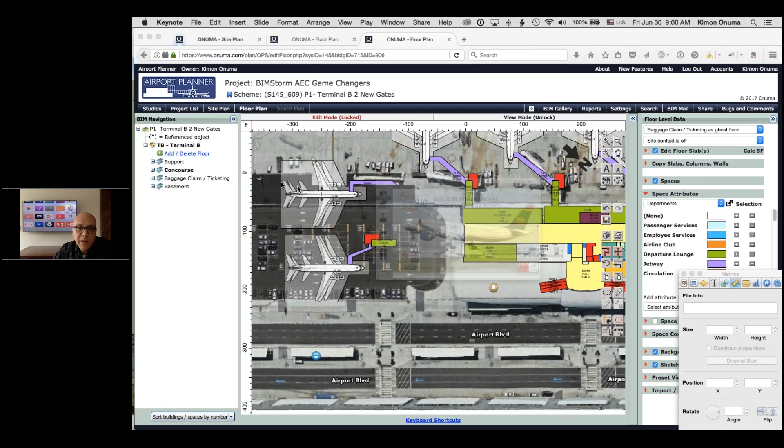Today is about a window seat on BIMStorm AEC Game Changers. If you go to BIMStorm.com, you can see the introductory webinar we had a month ago about the BIMStorm. We're happy to have San Jose International Airport and their data and floor plans inserted into the BIMStorm. We'll be presenting that today.

As far as the scenario planning, we'll be going through what we have been prepping for the last 10 days in preparation for this webinar and for the next few months to come.

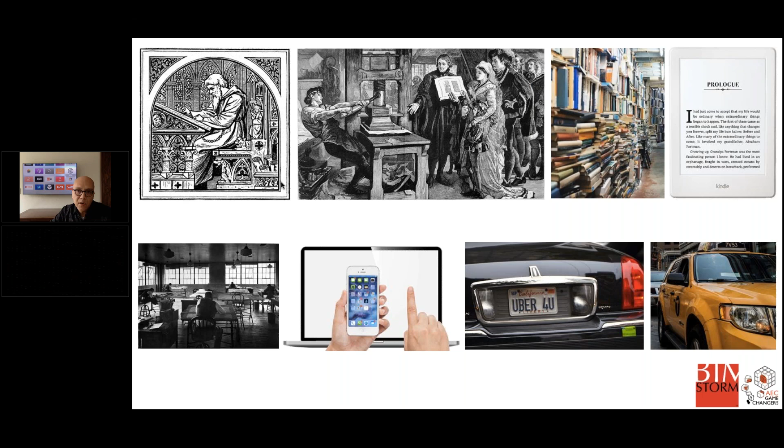This is about game-changing innovation, and technologies around us have completely transformed our world and how we work. We feel that the AEC industry is ready for this. We're ready to shift how we work in design, construction, and operation. That's what the BIMStorm AEC Game Changers is about.

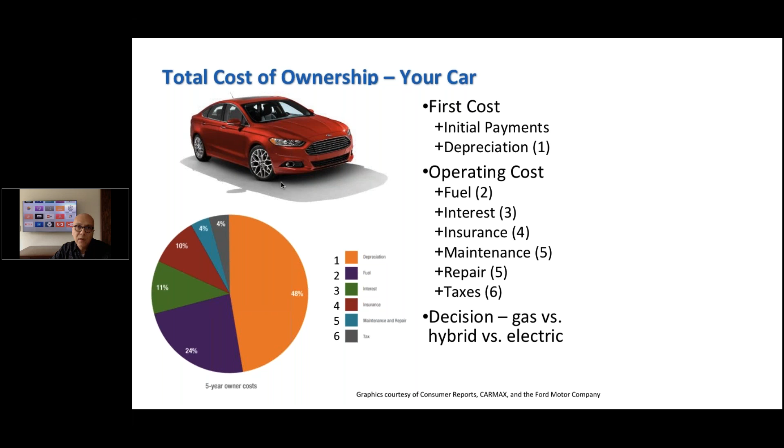Dana's presentation yesterday was about the total cost of ownership, and this really fit in nicely with the theme of the BIMStorm. This is something being developed at APA as part of the TCO working group. It's really about looking at everything beyond the initial cost of purchasing a car or designing and constructing a building. There are other costs we don't typically look at very carefully in the AEC industry, and we think that's the opportunity. How do we connect the dots and look at the total cost of ownership versus just the first initial cost?

To predict the future isn't really any magic beyond knowing that a roof is going to fail in 25 years and carpets are going to go in 15 years. So how do you factor that into the design, construction, and operation of a facility?

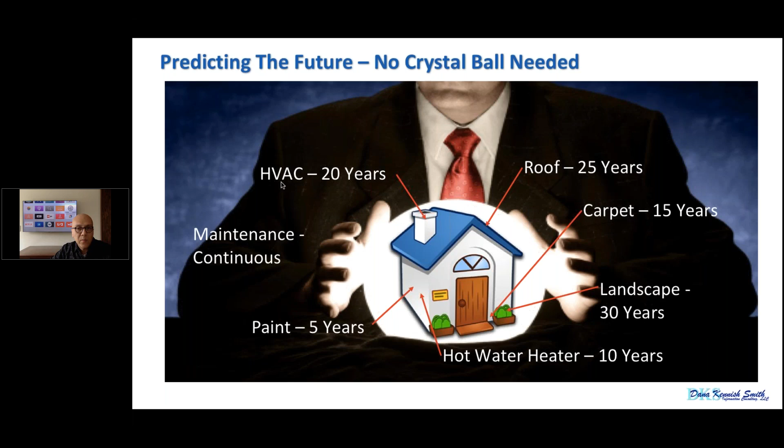Even in BIMobject, if you look at their products online, imagine if there was more information about the actual life cycle of the products, how much it's going to cost, for example, for a standard incandescent light bulb versus an LED bulb over time. Then we start making decisions based on that information.

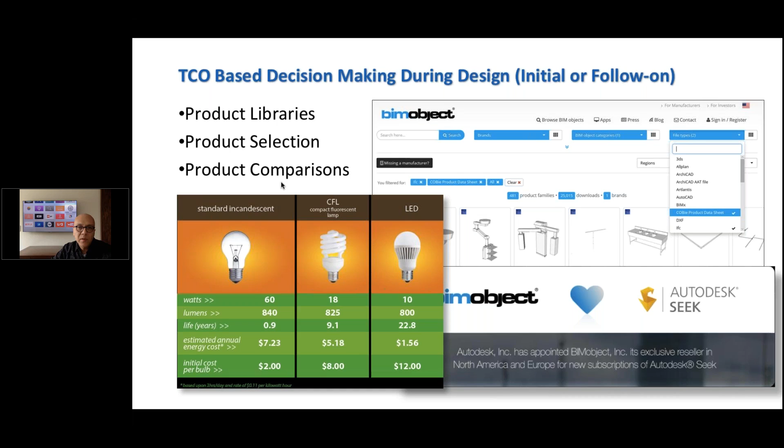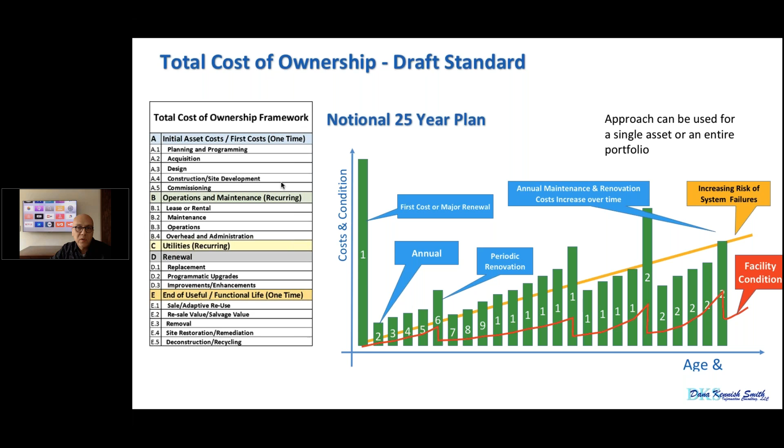So whether it's an individual light bulb or an entire building, or the entire life cycle of a building, there are stages that have been defined as a draft standard from the TCO working group about the total cost of ownership: stages A, B, C, D, and E. This fits in very nicely with the BIMStorm because we're talking about planning, design, construction, operation, utilities and costs, and then end of useful life—what do you do with it? An airport is a perfect example to work on for that.

In BIMStorm we are looking at Big BIM. We're not just looking at the single project or the single set of software tools. We're looking at the entire life cycle and how we can generate value beyond the initial design and construction of a facility, expanding the horizon.

In game-changing innovation, we had a series of great speakers, and today we're happy to have with us Jim Bedrick, who's going to give us some great examples of what's been happening in the building industry as well as outside of it, and how we can learn from that. So Jim, thanks for joining us today—are you prepared to switch screens and show us your presentation?

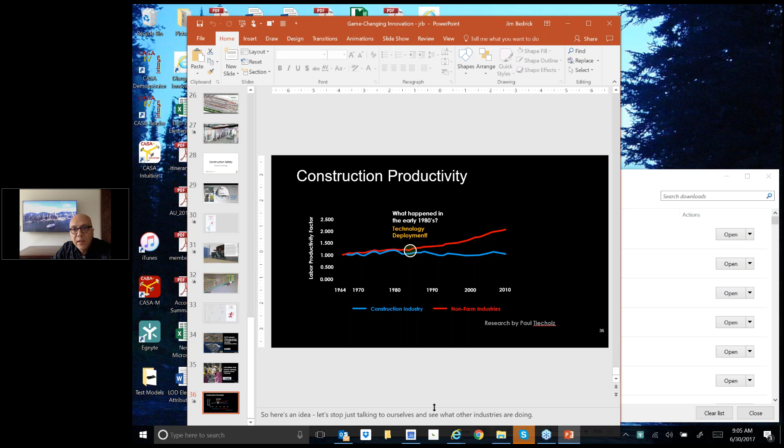Jim, are you there? Yes, can you hear me? Yeah, okay, had to get all the switches set. Thanks for coming, okay, thanks.

The issue is that many of you have probably seen this curve. The red one is overall business and industry in the United States, with farm industry taken out because farm production has soared in recent years and would skew that curve even higher. That's basically the productivity of overall business in the US. The blue one is productivity of the AEC industry. So you can see that while everybody else has about doubled their productivity, we've remained pretty much flat.

So the question is, we keep having these conferences, the AIA conference or the AGC conference or whatever. Some expand beyond their particular discipline into a broad range, but most conferences we see are to do with the AEC industry. So the question is, if these other industries have doubled their productivity and we've stayed flat, why aren't we talking to these guys?

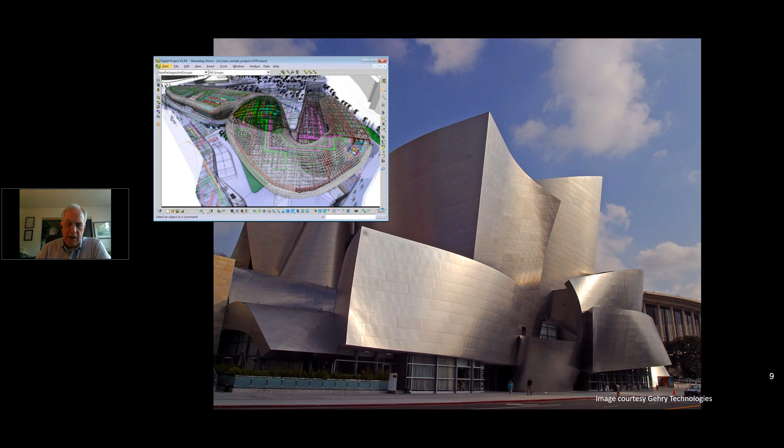Well, this industry does - again, the aerospace industry. They have to model all kinds of curved shapes. So Gehry Technologies got hold of Dassault's CATIA and put basically an architectural overlay on it, and now you have Digital Project, where you can model things like Gehry buildings.

Now, here's a really interesting one: integrated circuit design. So what possible application could this have to buildings? Well, first of all, there's just the processes of design and manufacturing. What do the manufacturing processes by which these things are produced do that AEC does not?

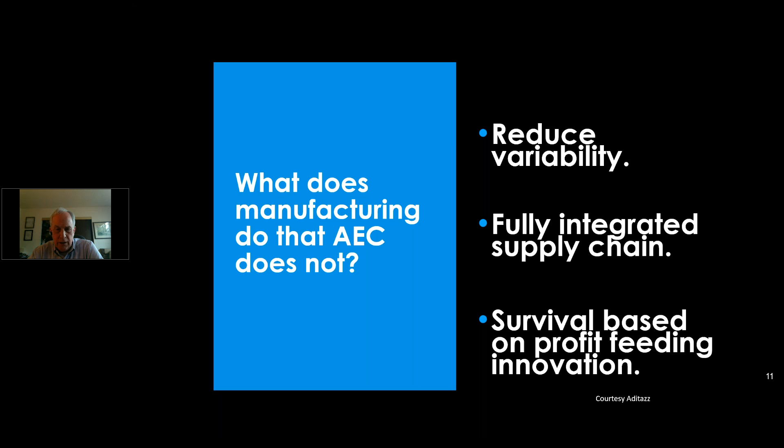They reduce the variability and fully integrate their supply chain, but the key point is that their survival is based on plowing some of their profit back into innovation. There's a takeaway for us, because most of our firms consider innovation a side issue and a cost, but these guys know they're not going to survive unless they plow something back in.

If we take another look in that light at the productivity of the construction industry, here we are way down at the bottom. So how come? Well, everybody talks about our fragmented processes, but also the buildings have increased in complexity, and we haven't kept up with that.

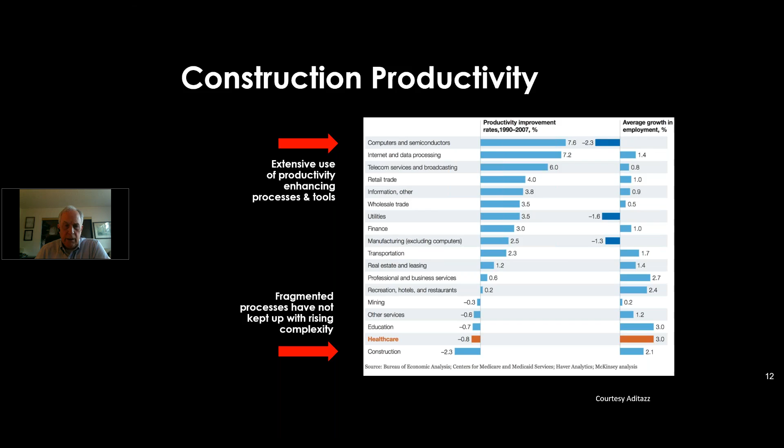Up here, where the productivity is high, they use productivity-enhancing processes and tools extensively. So like what? Let's take the example of the first transistor on the left there, and then how those are made today. That chip on the right has 2.6 billion transistors in it.

So what's the difference here? How can we produce these things now when we built this thing by hand before? Well, that was designed by hand. This chip is designed using electronic design automation. This thing was manufactured manually, the transistor on the left, and the design and manufacturing were separate. Today, the microchip industry tightly coordinates manufacturing and design. This took several days to assemble the first transistor. Now thousands of these chips are manufactured per hour.

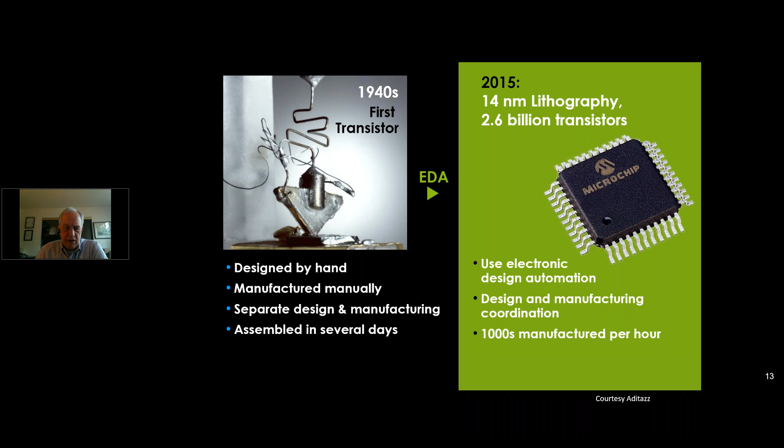The process used for the first one produces a lot of variability in quality, and it's pretty hard to mass produce that. Now we've got mass production, and it not only keeps up with Moore's law, this is one of the real drivers of Moore's law.

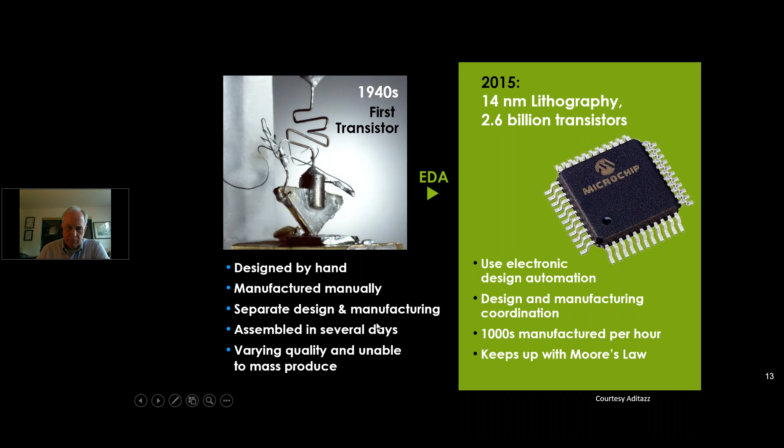So what does that have to do with our industry? If you look at the design of a microchip, things have to get from point A to point B in a certain amount of time, because the distance the signal travels will vary the time, and signals have to arrive at certain places at certain times. So things have to be adjacent, there have to be paths between them, and so on.

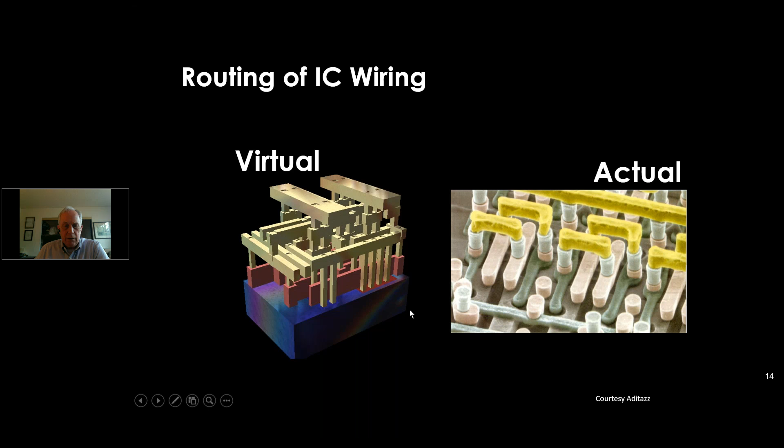So maybe you're starting to see a little bit of a similarity here. We talk about traffic paths and adjacencies and so on in our industry. If you look at the thing on the left, that is a design for a chip. On the right, we have a stacking diagram of a hospital. There are some similarities you can see there.

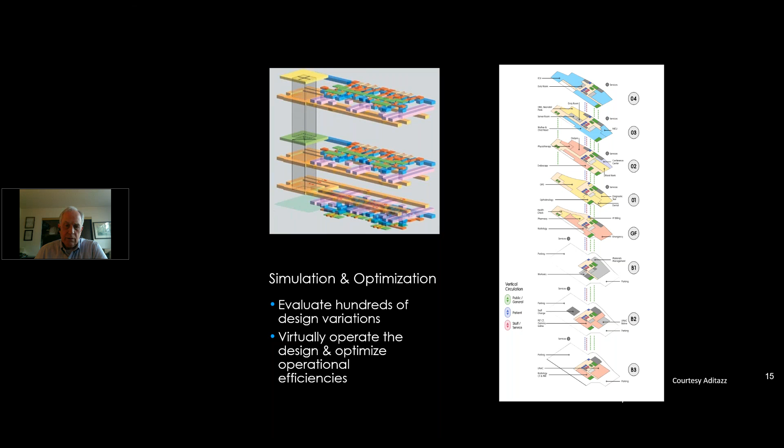In the chip, the EDA approach, electronic design automation, the chip industry is able to evaluate hundreds of variations and virtually operate and simulate their operation so they can pick the most optimal. An outfit named Aditazz applied that same design approach to buildings. We've got adjacencies, we've got traffic flows, and we can simulate the operation and pick the most efficient.

So if you compare these, compare a healthcare building with an integrated circuit. They both have high civic value, they're both significant capital expense, mistakes are costly in both of them, and they're both very complex. But the difference is they both require coordination across multiple disciplines. So how do we do that in our industry?

Some of us, sometimes, best practices are documented and recorded. Oftentimes they just simply live in a senior designer's head, and then they're applied ad hoc to new designs. In the integrated circuit industry, these tools are codified and put into the automated design system so they can be applied next time very effectively.

How do we deal with complicated systems? Well, in our industry, we route all of our MEP systems by hand, and at best we put them together in a model and see where they run into each other and start bending things around to make them fit. In the integrated circuit process, data flow is placed and routed automatically. We're going to get to how that specific one can be applied in a minute here.

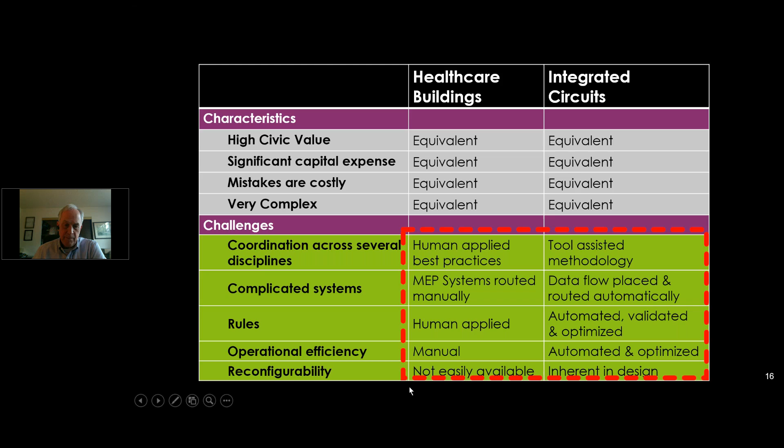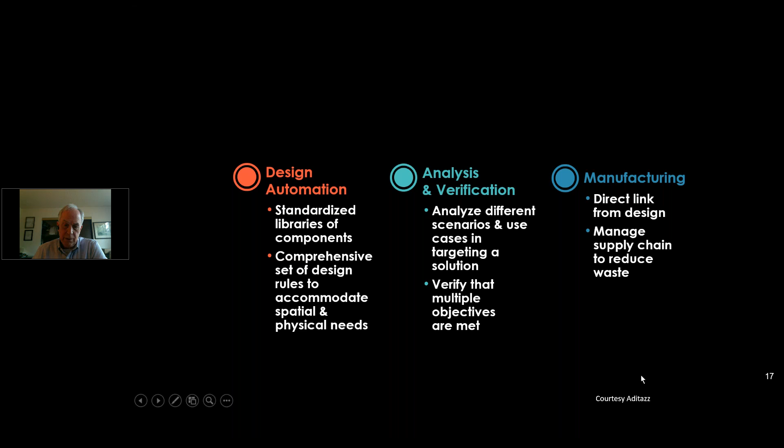And then in manufacturing, they have that direct link from design to manufacturing, which the mechanical trade industry adopted quite a while ago, where they can take their detailing software and generate code to drive the machines that actually fabricate ducts. And then managing the supply chain, thanks to the Lean Construction Institute, we've gone quite a ways down the road to getting a more efficient supply chain in our industry. But that came from outside the AEC industry.

So we mentioned there this idea of routing and optimization, not only in terms of layout of floor plan, but then in terms of routing of systems. And this again comes from the aerospace industry. And if you look, you can take a look at this.

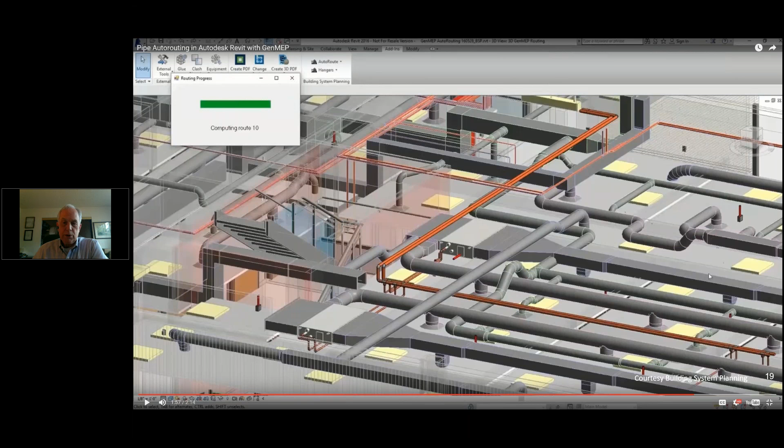This plenum here—you know, we think we've got it tough trying to avoid all the clashes in there. But look at an aircraft, and all that stuff has to fit into a wall that's a few inches thick of the airplane. Well, a program was developed for the F-35 program, where they put some Visual Basic on top of CATIA and developed some automatic MEP routing systems.

Well, an outfit called Building System Planning adopted this, acquired the IP, and applied it to MEP routing. So the main issue here is that they take these algorithms for clash-free routing. So rather than routing things and then fixing the clashes, they route them—they use heuristic algorithms to route them without clashes in the first place.

Well, how is this developing? Right now, automated point-to-point routing is accomplished—they're doing that. The next step is complete coordination and optimization. So it's one thing to get a duct from point A to point B and get it around all the obstacles between point A and point B, but what about getting the most efficient route? Basically, in a duct, the fewer bends, the less friction losses you have. And then the next is, of course, carrying that on to automated detailing and generation of CNC code to actually manufacture these from the design we just developed.

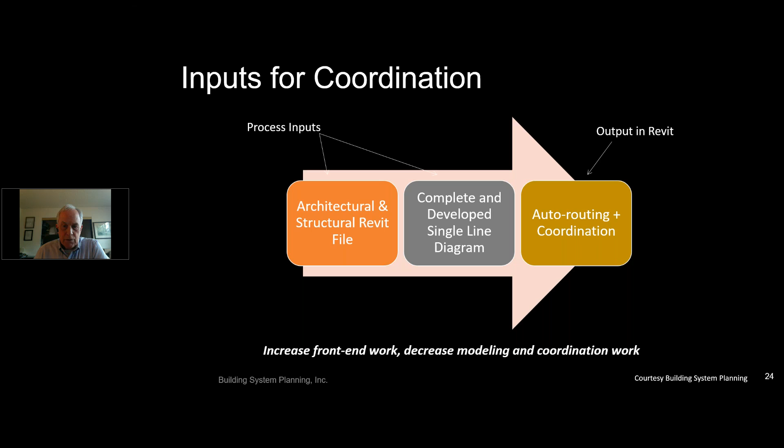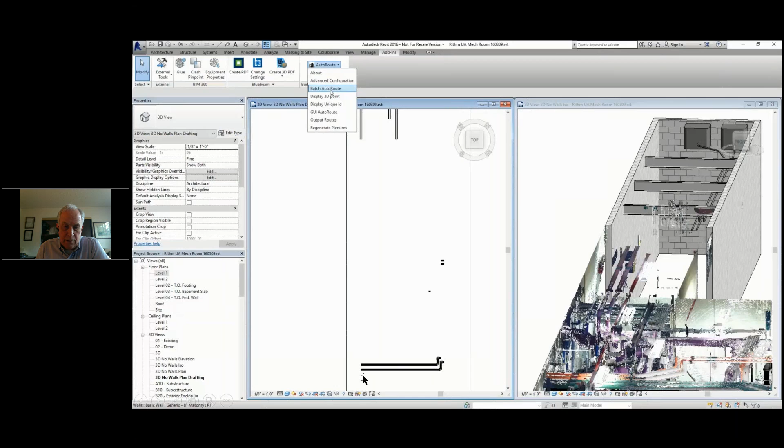So the routing, you can see that the system routed that and managed to avoid the obstacles that were nothing but a point cloud. So it works very well for adding new systems to existing buildings.

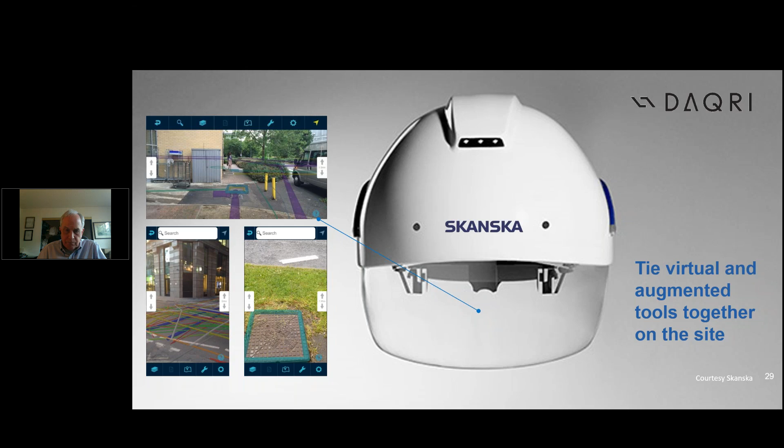Okay, here's a really interesting one that a couple of outfits are dealing with. These are some examples from Skanska. They began by using virtual reality helmets, the DAQRIs, and basically doing mixed reality where they superimpose designs and created scenarios on actual construction sites.

So they looked at this and said, okay, if we look at how we learn things - if we read about them, the author describes the subject, so we just hear about it. If we watch a movie, we observe the action, what's going on. Well, then if we get to an immersive game, one of the role-playing games, we actually are the subject.

So how this was applied to construction safety, there's an example here. They had fixed protocols for unloading heavy loads - they were supposed to be analyzed first, a plan made, and people spotting, and so on. Well, in this case, that didn't happen. The guy went to unchain the load and was hit by several heavy steel members.

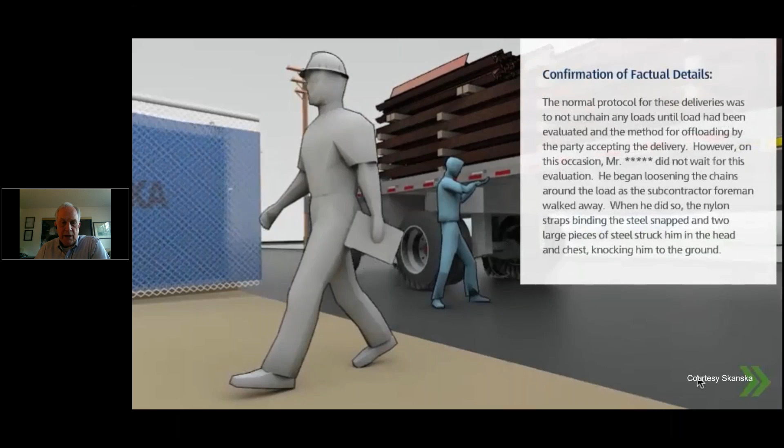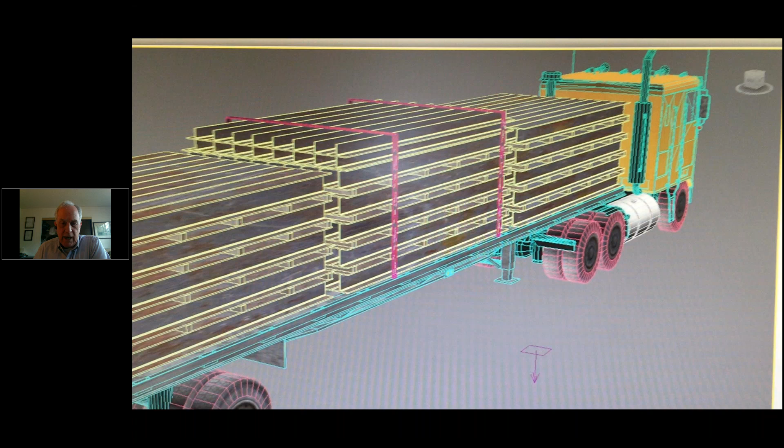All right, to train on this particular incident, you could read about it, you could watch a movie of it, but what they did was create a video game, and the trainee would come in and say, okay, how am I going to unload this? Well, I'm going to go up and just loosen those chains. And then, whoops, that's what happens. Now, obviously, this is going to be a lot more effective than reading about it or watching a movie. You just saw those steel members fall on you.

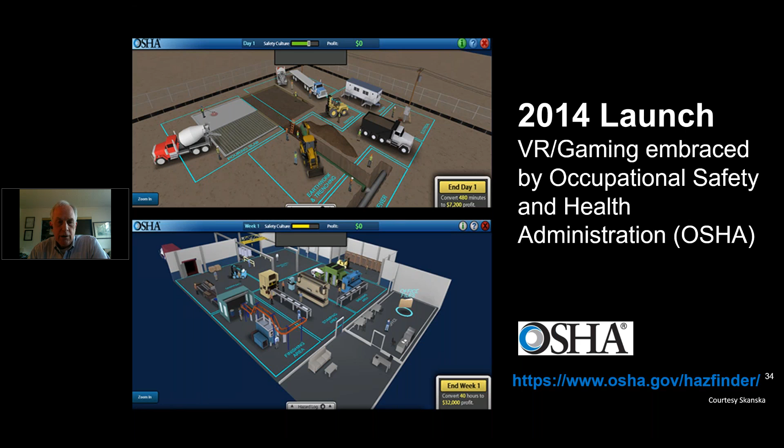So this is a case where the trainee became the subject, that expanded back in 2014. Even OSHA adopted virtual reality and gaming technology for safety training.

Some of the rental outfits, like United Rentals here, have also adopted it. And here is a guy that's training on how to use a lift, and he's actually watching himself place the things that he's lifting here. Obviously, a whole lot more effective than reading a manual.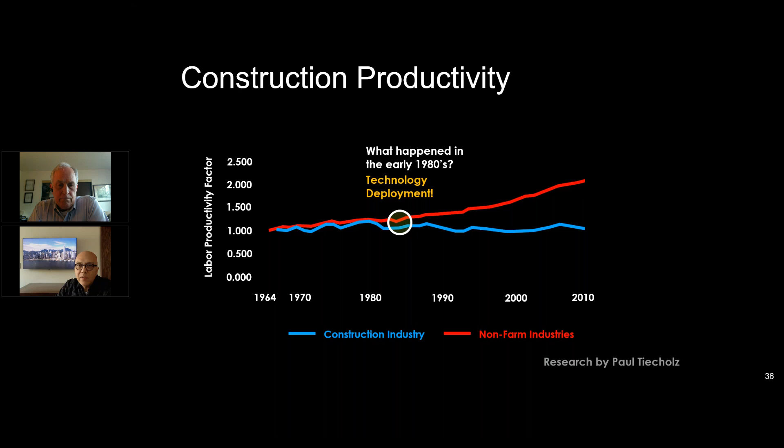Okay, Kimon, did you want to take some questions? Yeah, thanks, Jim, that was great. Yeah, so a few questions and comments. Let me switch back to my screen here.

What you talked about is game-changing innovation, essentially, and what can happen with the AEC industry. You and I both have been very involved with many standards organizations and industry groups like the AIA, the IPD. We were both on that committee, and you started all that, and you've been a great innovator and a push for the industry. But do you think the AIA and architects are changing fast enough? That really always concerns me, looking at what's happening elsewhere and that we're not applying it. We're kind of waiting to be told what to do. And that gap obviously is an opportunity, but if we don't take that opportunity, others will. What's your view on that?

Well, that's a great point, Kimon, and there are two issues there. One is that we often talk about, well, we're going to wait till the owner asks for it. We're not going to do BIM until the owner asks for it. Well, the owner doesn't necessarily know. The owner is not an expert in the design and construction industry. We are. That's what we're getting paid for. So we need to be proposing to the owner the kind of things that will help their project.

The second piece is, you saw that piece there with the chip industry where their survival depends on plowing some of their profit back into innovation. Now that is starting with a few people - I believe Mortenson is one of them - actually having an innovation department, whose purpose is to actually find new things. I think we have to go there in order to really make any advances into that gap in productivity.

Good morning, everyone, good afternoon now. My name's Mark Giuliani, I'm with Giuliani Associates Architects. We're a firm that's been practicing architecture in the aviation and transportation industry since the late 1950s, and we've been involved in every part of airports, from small coffee shop kiosks all the way up to very large hangars and complicated cargo facilities and terminal buildings. Kimon and I have worked together on several projects, and I'm delighted to be here today to help Kimon demonstrate some of the work he's doing.

Kimon, we can't hear you. Thanks, Mark. Just to reiterate, we had Patrick Crowley on from San Jose Airport on our last webinar, and he's not able to make it today, but he will be with us for future webinars. Patrick actually initiated a discussion. He was watching previous webinars where we were talking about healthcare planning, and he was asking a lot of questions from an airport perspective, and we decided to actually make that part of this BIMStorm.

What we want to show you next is what's happened over the last, it hasn't been that long, about 10 days, and you can follow it on BIMStorm.com as well. We saw this from Patrick. He sent us some documents about San Jose Airport, PDF and CAD files, and we said, do you have any GIS files? We started looking at the type of data they had, and we said, you start with what you have, and what can we do with that type of information as we put it into a BIMStorm and make a scenario.

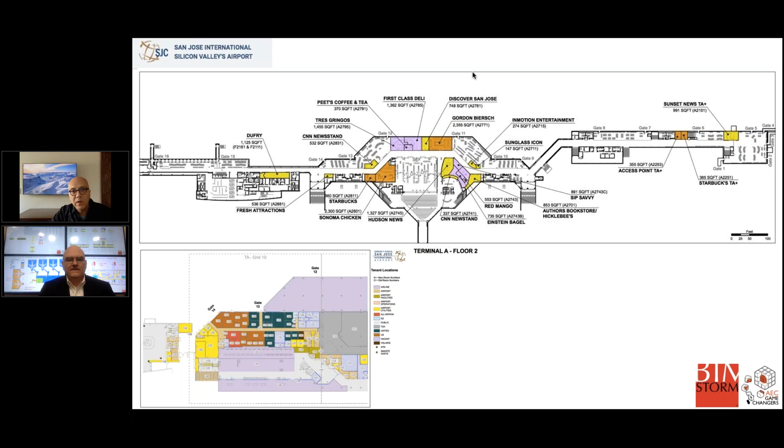So we built up these scenarios, and these are actually live on the web, and Mark's team and the Onuma team and others have jumped in and started to run through planning scenarios. It's amazing how much can be done in a very short period of time when you start connecting the dots, taking data and automating things into the model, then generating what-if scenarios with it, putting the knowledge of a team like Giuliani has about airports into the mixture, and converting.

For example, we looked at the master planning documents that were in PDF format from San Jose, and we saw that they have existing facilities, a pretty new Terminal B, and the master plan talks about a 700,000 square foot expansion with 10 new gates, a new 9,000 car garage, and a new 3,000 car garage. We also identified a clinic off-site, right in San Jose there, that would be a perfect place to land a medical facility, which we're making part of the BIMStorm.

So this BIMStorm is going to include, obviously, airport type facility information, but also office space, office moves, renovation of existing facilities, and a new healthcare clinic. We're really putting a lot in this mixture and looking at it from a perspective of how do we challenge the industry and actually do things with this.

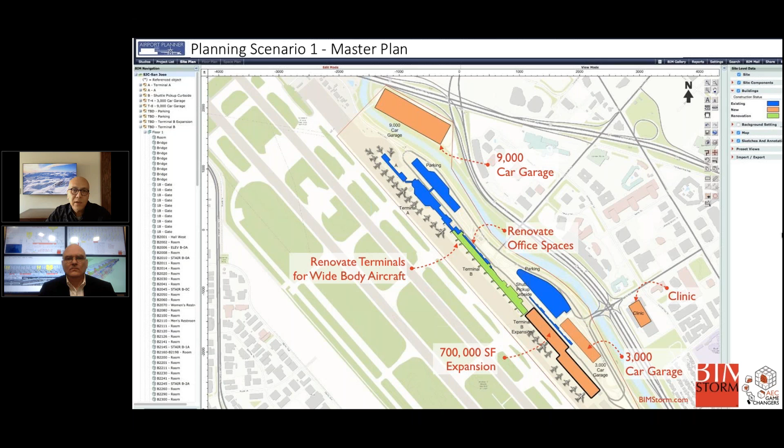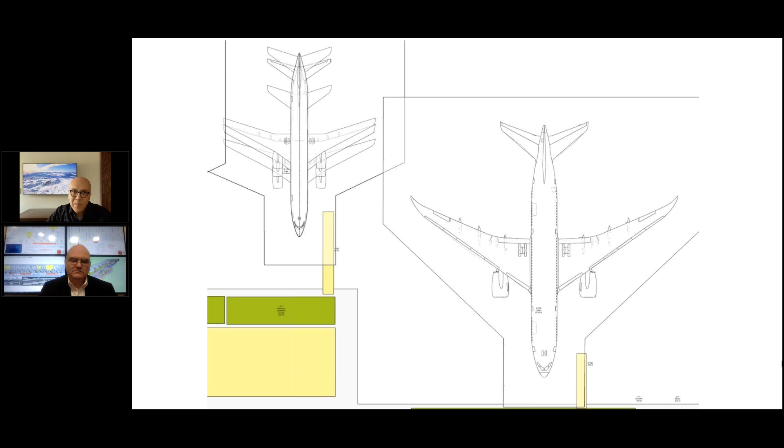So the next thing we said is, okay, what really drives this? Obviously each facility type has a specific driver. If you're designing schools, obviously the students and faculty are a driver for that. In an airport, we're dealing with aircraft coming in, dynamically changing schedules, people coming off of those aircraft, driving the need for space.

We need space for larger aircraft coming into San Jose. More recently, San Jose started having a lot more 787s arriving internationally, direct flights from Beijing, Frankfurt, and other areas. That drives a different type of need at the terminal to support an international wide-body plane coming in, and converting areas of the airport to support that need.

These are real scenarios that Patrick Crowley from San Jose Airport gave us, and we have this as a live scenario in the tools we've been using, the online tools. We're using a whole range of BIM and non-BIM applications, from Google Docs, Google Earth, ArchiCAD, Revit, SketchUp, Onuma system. It doesn't really matter—it's about how we connect the dots and make it work with BIM and non-BIM tools and experts.

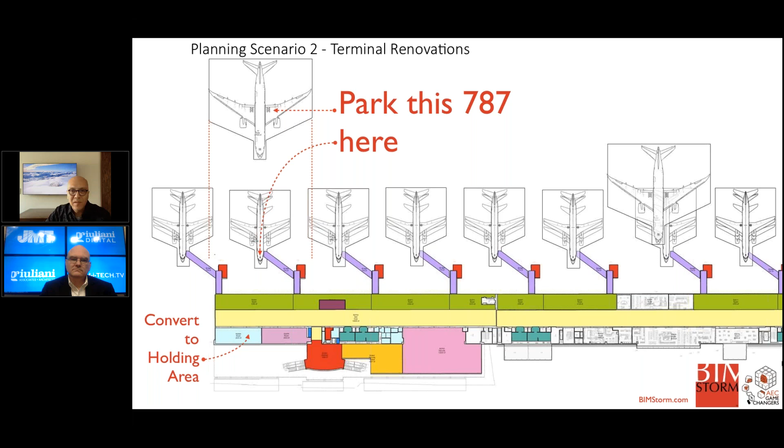Aircraft people know a lot about how aircraft maneuver and how much space they need to park. As a designer, we need to absorb that information and make sure the terminal can support that. So that's one scenario—terminal renovation to support different types of aircraft, and the optimization of the schedule and arrival and departure of aircraft to optimize a terminal, making it a good place for passengers and for retail to support passengers' needs. All that is a reconfigurability challenge, just like Jim said. Everything is a moving target, and we don't know what's going to happen a year from now, let alone two months or even two days from now.

So in the BIMStorm, we also looked at airline schedules. Imagine data like this online that says here's an aircraft coming in from Beijing—and we actually did this live the other day, as the plane was coming in. We were doing a what-if scenario with that live data, saying the plane is delayed an hour, or coming in an hour earlier, and needs to park at this gate. What does that look like?

Taking schedule data that already exists and injecting it into BIM, color coding yellow meaning an aircraft coming in, color coding red meaning an aircraft getting ready to depart with people waiting in the lounge for that departure. That has a huge impact on how you plan and design facilities.

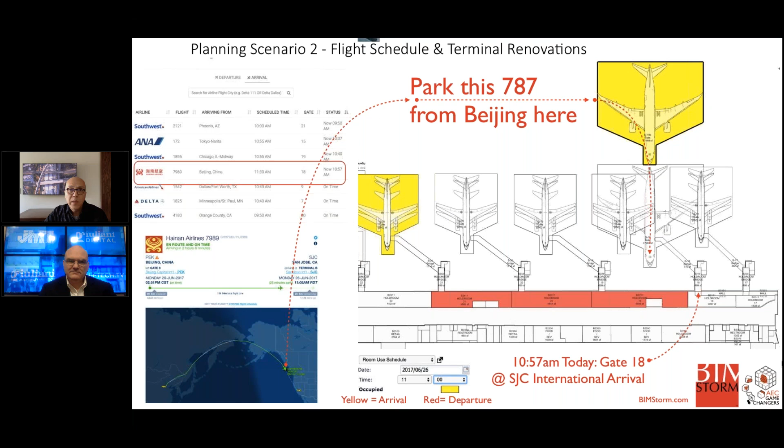And then, Mark, maybe you could jump in on this—from another perspective, looking at the DNA of what it takes to put an airport together. If you break it down, there's obviously aircraft and their need to park, but there's also the need for lounge areas, holding rooms, and support facilities. Mark gave us a lot of input and started building up these templates, which we've actually been working on for years, but now we're exposing more of that process as part of the BIMStorm. Mark, would you like to say something on this?

Airports, as people who work at them, design them, and build them know, are very complicated facilities. It starts at the curbside, and you have to handle baggage and security and everything—here we really focused on the gate and what drives the demands that airlines and airports have with gates. Some of the new things in the industry are common use gates, so how can these be adjusted on the fly as different size aircraft come in? It's the size of the aircraft and the passenger count that really drives what determines the size of the hold room, the size of the concourse or circulation, and how you move passengers through there.

There's also the revenue generation side, where more and more airports are focusing on revenue from concessions. So what we did was take data we've been building up over 50 years, and data from the industry, and put it into a spreadsheet, analyzing the different types of aircraft that fly into San Jose—primarily 737s, 777s, and 787s, so a mixture of narrow body and wide body. We started to develop two different types of hold rooms for that. What you see on the screen now is a narrow body on the left and a wide body on the right.

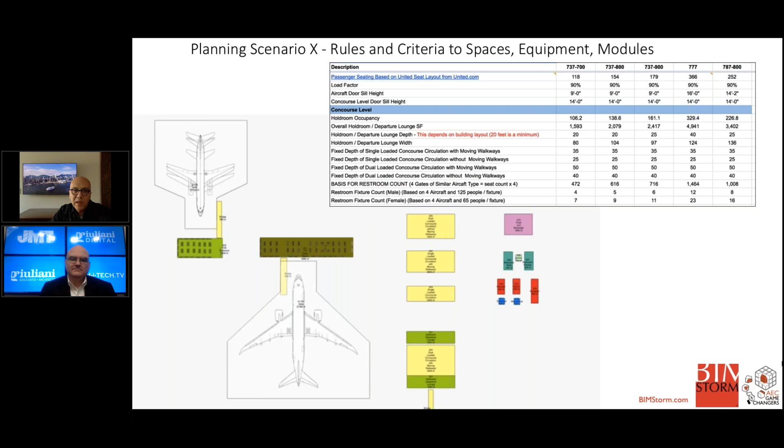Because if you go to a different airport or have a different business need, some of these rules are going to change. For example, the aircraft wingtip-to-wingtip distance—I might be using the wrong terms—might vary by airport or by country, or might be all the same. We don't know, but if we start capturing that, it drives how much space we need between aircraft, which drives how much lounge area we can put in the terminal, which drives how wide that space can be, which drives how much circulation we need as aircraft come in, which ties back to that schedule we were looking at earlier.

If this area of the airport is very crowded at 5 p.m. and all the aircraft are coming in, do we have enough circulation space, and can we reschedule more aircraft into that area? Very simple concepts in many ways, but very dynamic, with a huge amount of data.

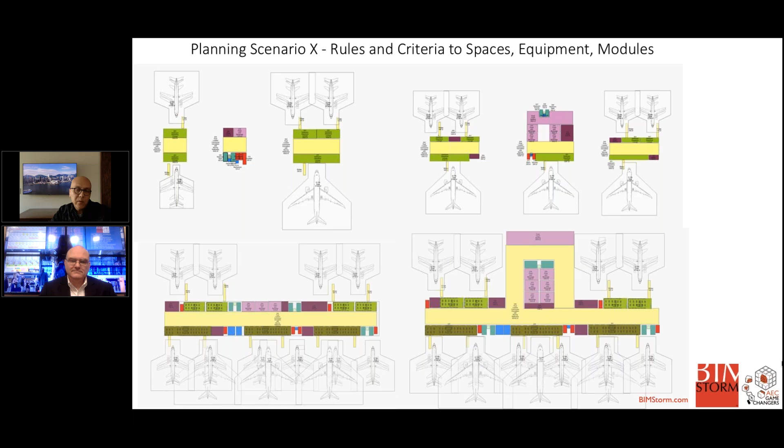I want to stress again that what you're seeing on screen was done just in the last 10 days or so. This model, and we'll show you live a bit more later, used configurable modules to rapidly configure a terminal, which was then exported to Revit, ArchiCAD, and even SketchUp. In our world, we don't care what tools are being used as long as they're talking the same language and able to visualize.

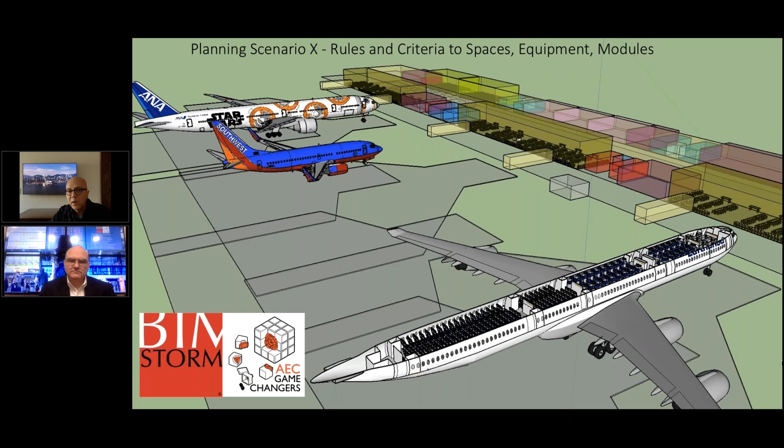And here's the actual aircraft coming into San Jose: Lufthansa, Southwest, and ANA—a 777, a 737, and an Airbus A340, I believe. And inside the terminal, you see the spaces that Mark was describing with the actual seating arrangements, the prototypical seating arrangements that could be used to rapidly block and stack and then move on to more detailed design.

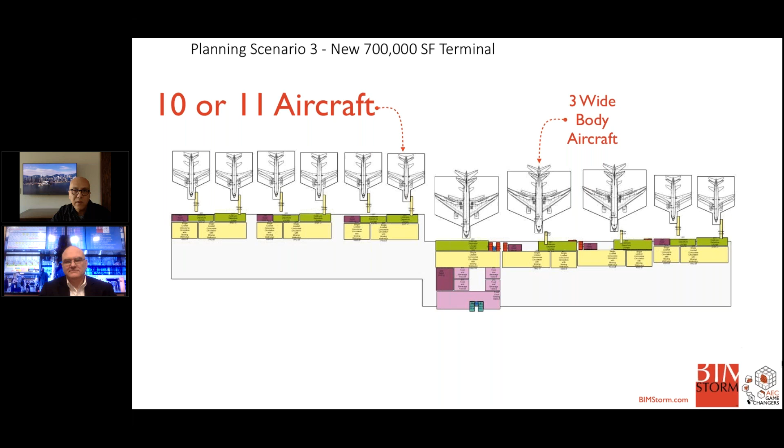So for the new terminal, the 700,000 square foot terminal, we use these modules now and have started stacking them to see: can we fit 10 aircraft or 11 aircraft, how many wide bodies can we fit, and how configurable can it be for different types of aircraft going in here.

And then from a total cost of ownership perspective, as you're doing this early design, you can start generating—well, this is how much it's going to cost to operate and maintain this facility.

This could be a rule of thumb, or it could be very accurate in many ways. If the airport San Jose already has existing data from their current Terminal B, you can apply it based on square footage or people count to start generating a range that we're looking at as we start making design decisions.

So as Deke presented yesterday, it's these initial, very early decisions that are made that have a huge impact on the total cost of ownership and the life cycle for a new facility.

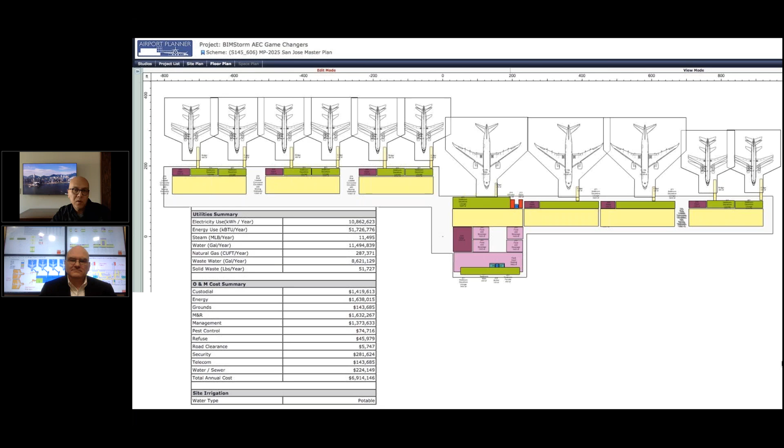But also, as we reconfigure an existing facility, this is Terminal B, this is an actual scenario set up by San Jose Airport saying: Terminal B, we want to park 2 new aircraft at the end of the terminal. They're planning for building 2 new gates before the 700,000 square foot expansion goes. This layout might be the wrong initial layout, but the driver is 2 aircraft.

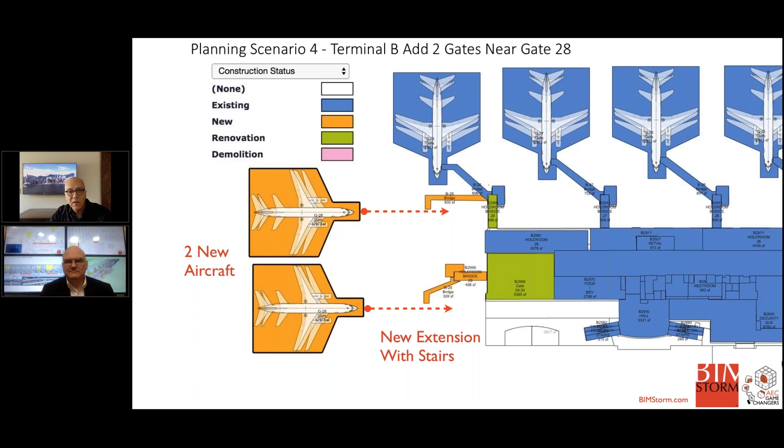How do we park it here? Do we have to change the existing gate? Do we have to expand something? Do we need a staircase here? All of that was actually one of the scenarios that we're planning.

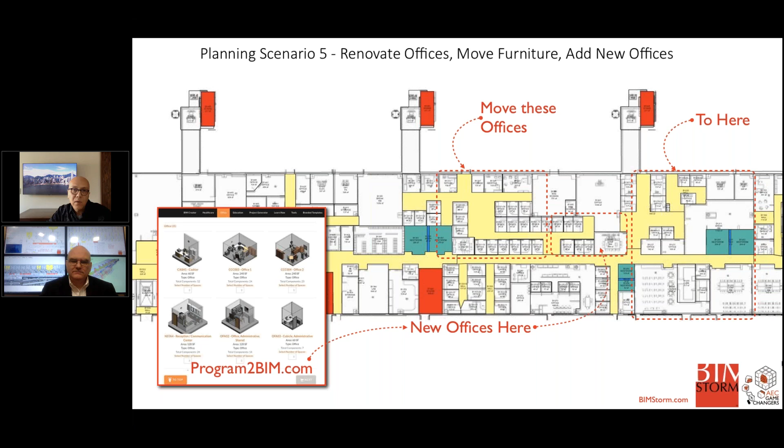This is scenario 4. Scenario 5 is downstairs on the first floor in the support facilities. These are the office spaces that support the aircraft and the different airlines that are down there, and they're constantly moving offices and spaces and equipment, and we're going to be doing a reconfiguring and moving of equipment downstairs.

Then we're also going to be looking at equipment going in. This is actually from BIM object to Sloan Faucet, and we're running through facility management scenarios.

Now that we have all this data in, we've converted it to COBie. We also have a facility management app called BIM Genie running on top of this, where we're actually submitting work orders. So we're slicing across the entire life cycle and saying, what happens if this data is configured in a way that could immediately be used for facility management, either in the existing facility or in the new facility.

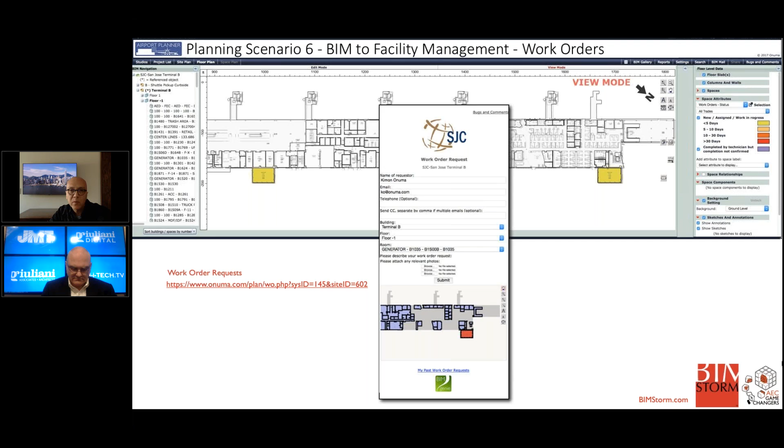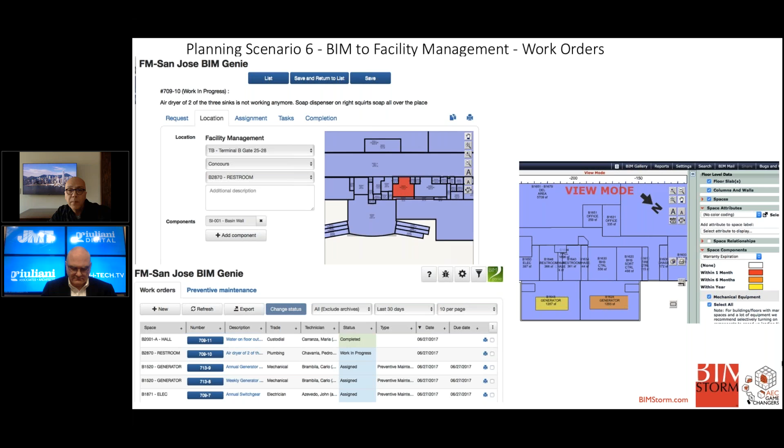And we want to really test this out in the BIMStorm. So we have this ready to go with facility management and work orders and technicians responding to work orders, and the actual generator rooms that we've identified in the building, and the type of generators that could be there and how do you maintain them over time.

And all these interfaces are ready to go and to be used for those that join the BIMStorm and declare what you can do with us. We can actually give you access to this, and we can run through some scenarios.

So the question comes of, why would anybody want to be part of this BIMStorm? First of all, we're pushing the envelope and demonstrating what is possible. We have owners that are looking in on this. We have conferences that these are being presented to. So if you become part of this, you learn, and it's free to participate.

We're obviously looking for sponsors, but more importantly, we're looking for active participation. You can still watch if you want, but the way to be part of this is to actually be part of that role-playing game that, like Jim said, if we can do this role-playing with real data, then you become an expert and you can turn this into a value that you can add back into your portfolio of capabilities that you provide to your clients.

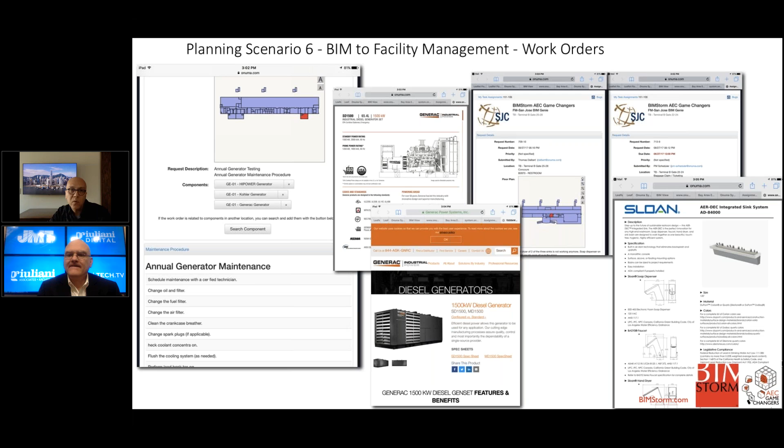Or as an owner, we're looking for other owners. If you have another airport or a healthcare facility, we'd love to hear from you and become part of this BIMStorm.

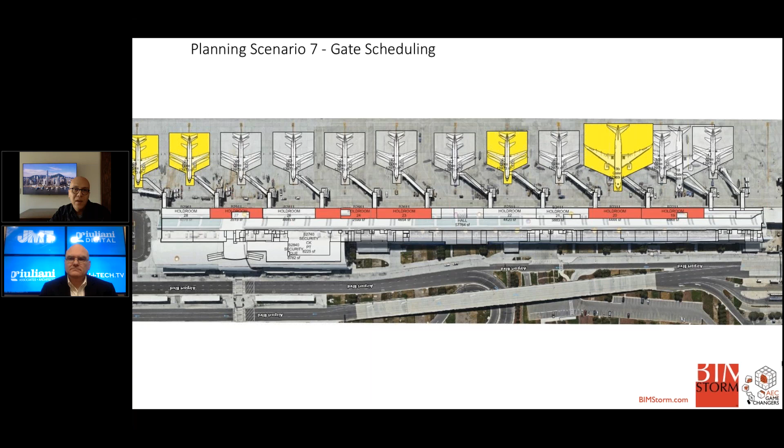This is the gate scheduling scenario. So now that we have the building in, we know which flights are coming in, we have a flight schedule that is a database online, we can start driving what does it actually look like at 5 p.m. in the afternoon with those gates. Yellow means arriving flights, red means departures, and as the schedule changes, it basically just sucks in the new schedule and spits out a new BIM with this configuration in the BIM.

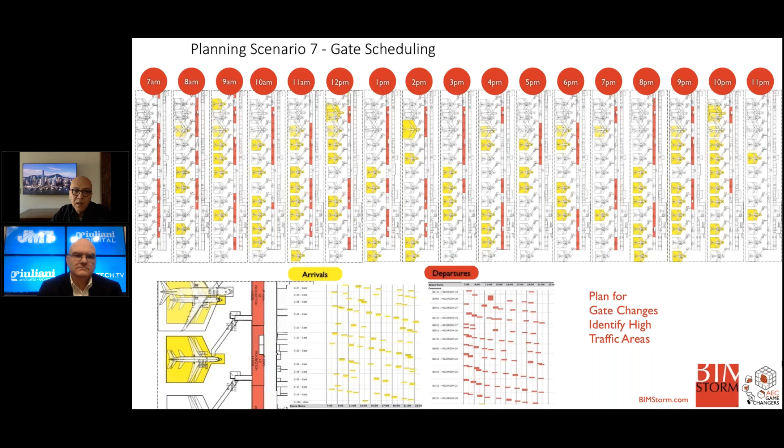And the total cost of ownership scenario is scenario 8. With Deke's guidance, we're going to be looking at how to insert those stages of total cost of ownership into the initial planning of the new facility and the renovation and the maintenance of the existing facility.

And we're also going to be including scenario 9, the planning of a clinic, which some of you have seen. We'll be inserting that into the BIMStorm as well.

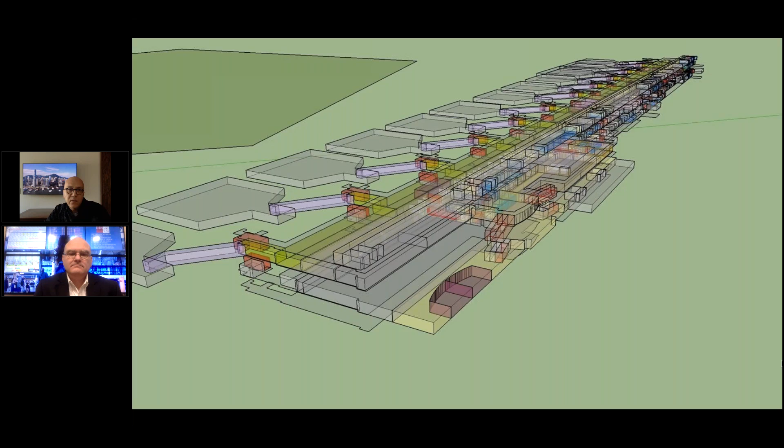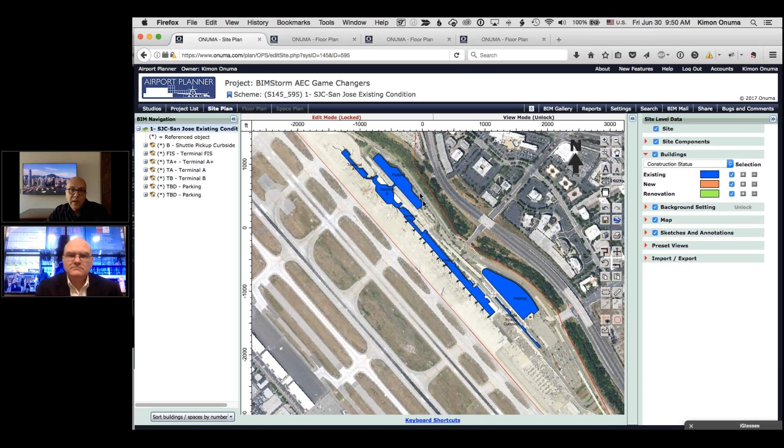What I'd like to do now is show a little bit of live view of this data to emphasize this is not just a PowerPoint—this is actually the live data of the existing condition. You see the existing facilities there, and if you drill inside the existing facility, you can actually see the layouts. We have the BIM, GIS, and CAD files of all this, in Revit, SketchUp, ArchiCAD, whatever format you want.

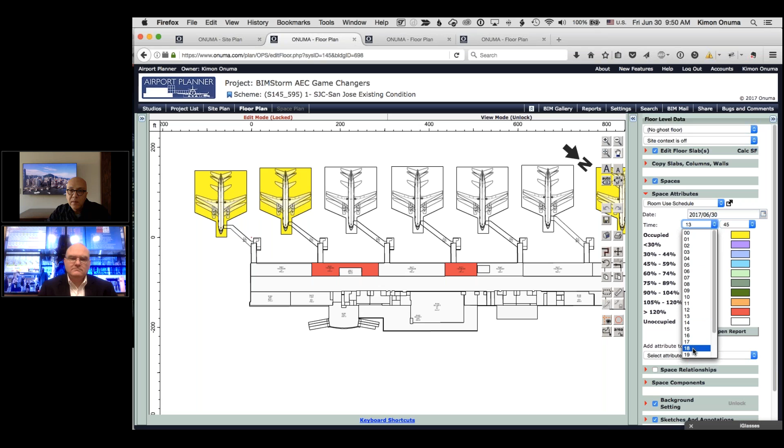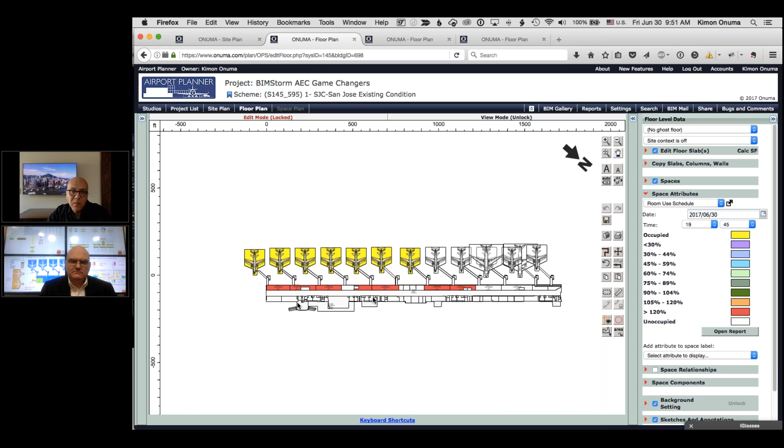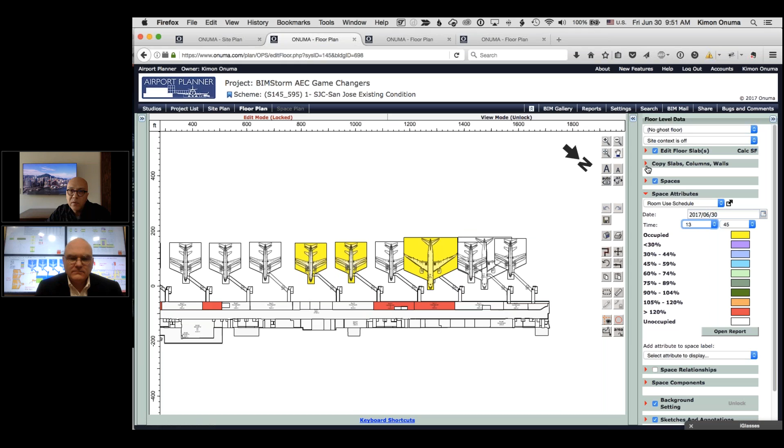This is the scheduling data that I talked about. So if we go at 7 o'clock at night, you see a lot of flights coming in. Yellow means arriving flights, so it's going to be pretty crowded there. You'll notice that at 7 o'clock, a lot of the Southwest flights are coming in here. The international flights actually come in closer to morning or afternoon. So at 1 o'clock, for example, there's a flight coming in right there—I think that's the Lufthansa or British Airways flight—and there's a flight departing at the same time.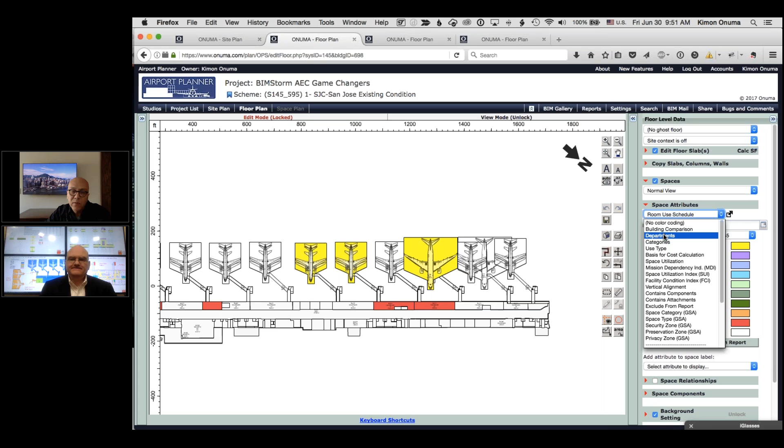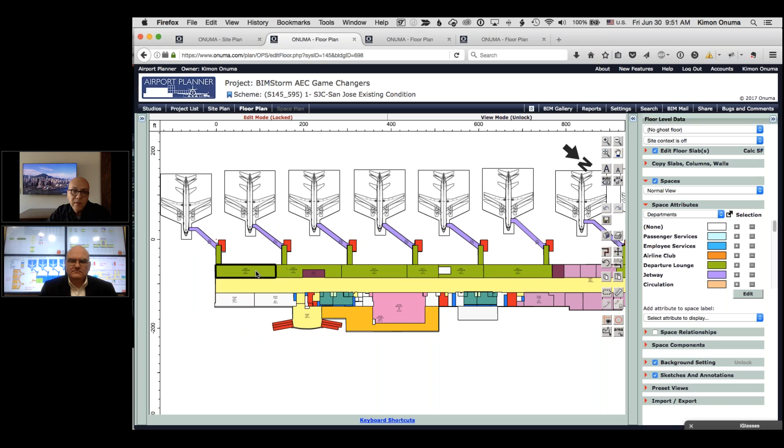We also have captured other information on all this, and I'm going through this quickly because for those that jump in, we'll give you access to this data live so you can actually see the departments and the floor finishes. We've documented a lot, and we've taken over 400 photographs inside the terminal, even linked to data directly from the site here. So if you go to any of these rooms, we have links to our photographs as well as the Google map view, the 360 view inside the terminal, so you can see what that section of the gate looks like. Pretty powerful stuff when you start using what is available and working with that.

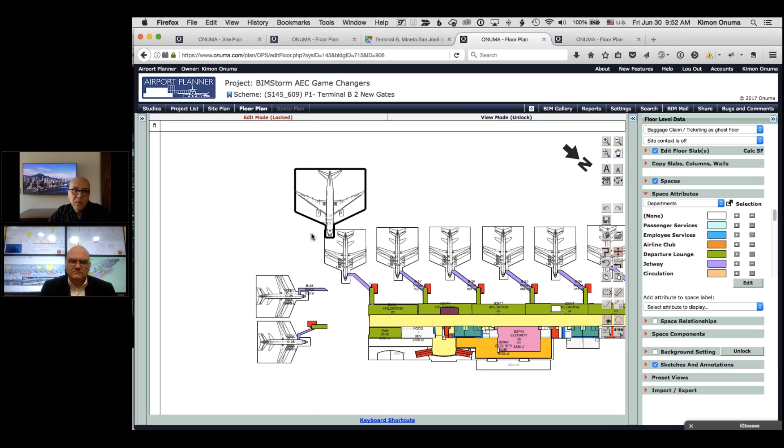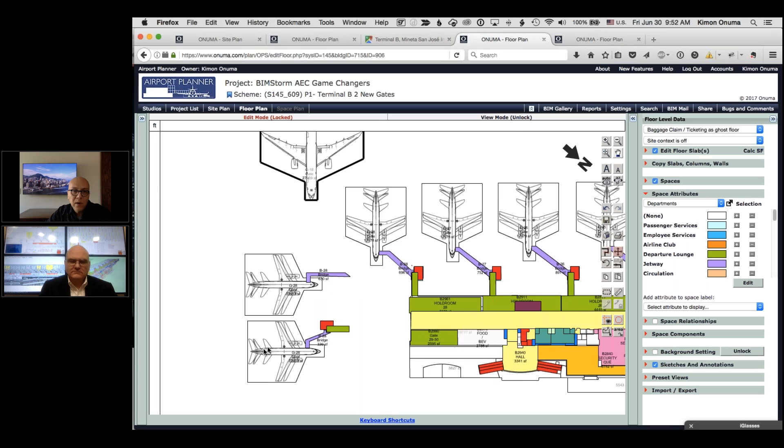The last one would be the aircraft scenario. So if we go into edit mode, this is a web tool—one of our tools—but we'll give access to those that jump into this. Here comes a 787. Where do we park this? Here's the 2 new gate scenario requirement from San Jose Airport. We need to fit this somewhere here on this side of the terminal. Where does it go? Can it go right here? Okay, if we park it here, then we have holding rooms there.

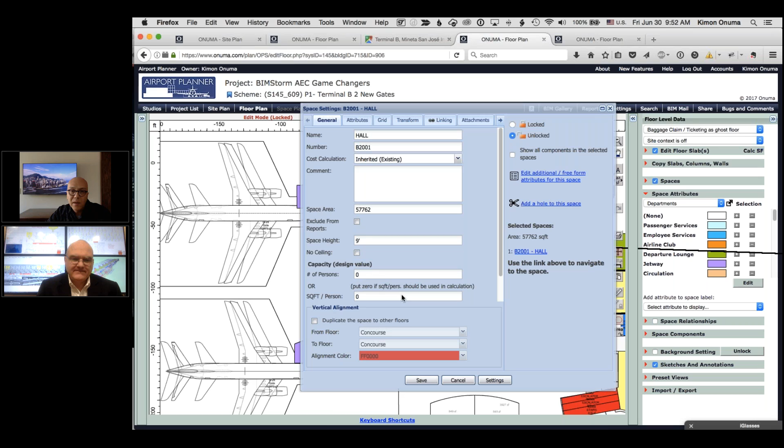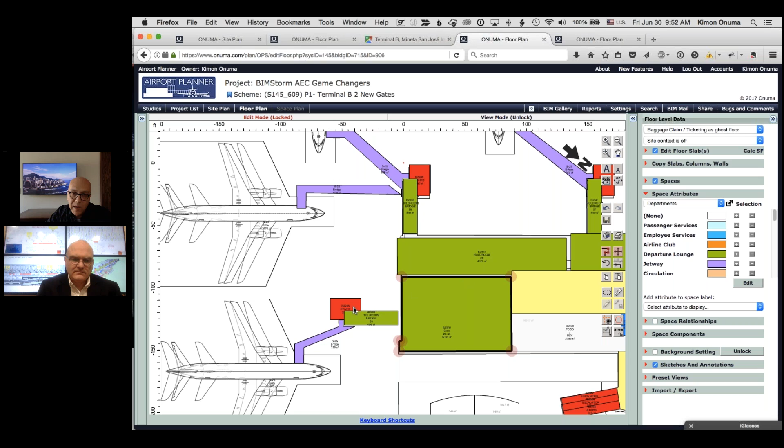Can we possibly say that we don't really need this to be all a corridor here, and we can stretch the holding room over? So you can do dynamic planning like that—let's stretch this out over here and pull this over here. The reason this moves so quickly when we start collaborating is these changes I'm showing here, Mark can see immediately, and we can collaborate wherever we are in the world and ask, what does this look like?

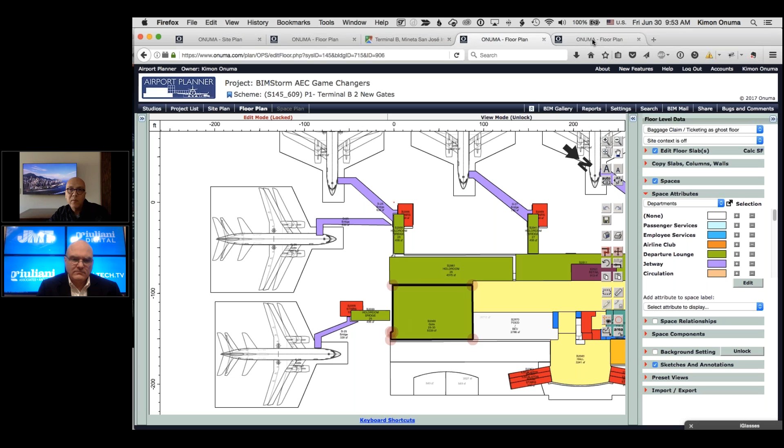We don't need a full-blown heavy BIM model to be able to do this. It's basically quick configurations, but embedded in these shapes are all the information we talked about, to go into the detailed design as needed. Here's a new 700,000 square foot terminal, again configuring how we park this aircraft based on Mark's modules shown earlier—modules side by side, we have some extra space here, maybe we can put more retail in there, and we go from there.

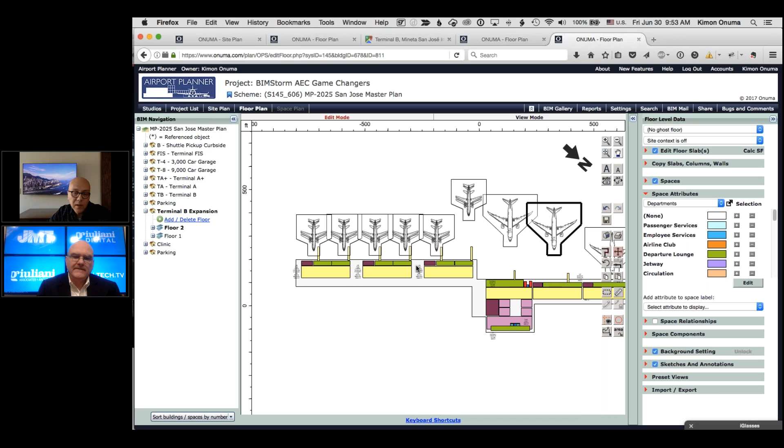So it's quick what-if scenarios to do that game playing, the role playing that Jim talked about. It really works in both different types of airport formats, whether you have a large airline that has leased a number of gates with different flight schedules changing because of international flights they're going after, or if it's more like San Jose where there's common use gates and they're trying to generate as much revenue each hour off of each gate—they can on the fly change those gates to different airlines and increase the airport's revenue. So it's very important. This tool really helps those situations.

It's about all these tools, but also about the process that's being developed here. So for example, we'd love to have, and we've had this in previous BIMStorms, participation from the builders out there.

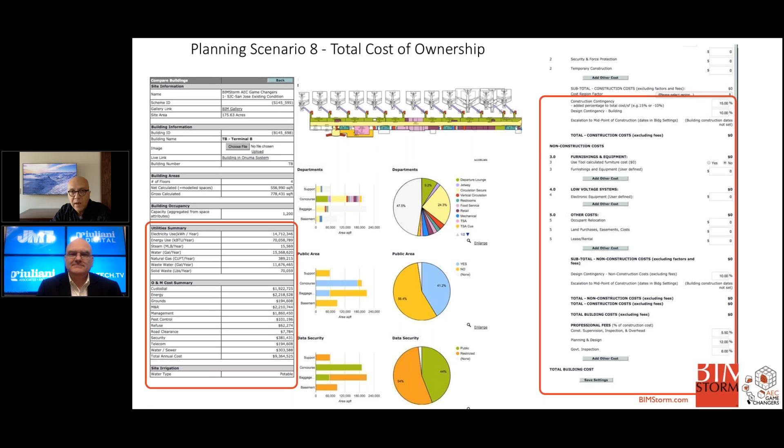Imagine as we're doing this configuration, if we could start getting some early cost estimates of what it's going to cost to renovate something like this, or what it's going to cost to build a 700,000 square foot terminal that looks like this, or from other cost engineers or specifications. Whatever kind of specialty you have, if you're willing to plug your capability into this, we'll highlight that capability and demonstrate it back to the webinars and conferences we're going to be doing.